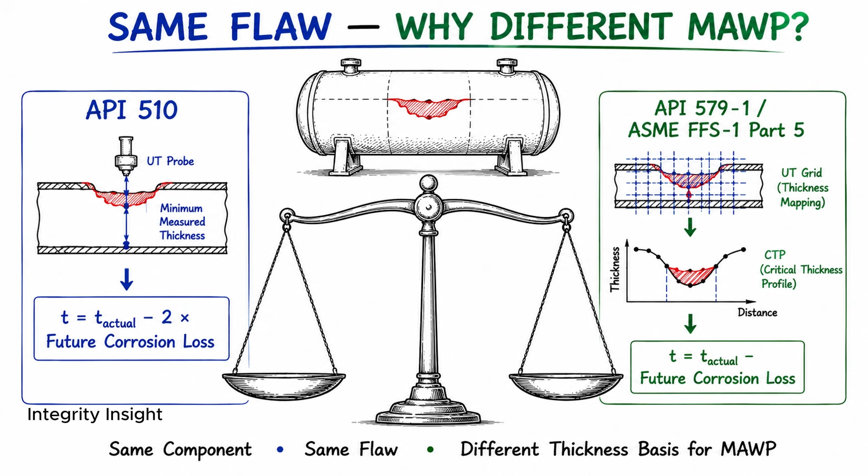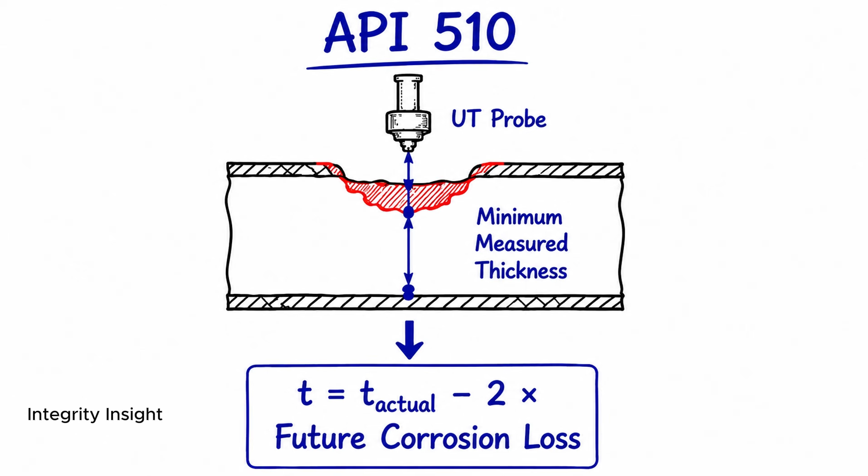How can the same metal loss flaw produce a different assessment MAWP under API 510 and API 579 Part 5? Under the API 510 approach, the thickness used for the future MAWP calculation is based on the actual thickness, minus 2 times the projected future corrosion loss. Under API 579-1, ASME FFS-1 Part 5, the future corroded thickness is based on the actual thickness, minus 1 projected future corrosion loss.

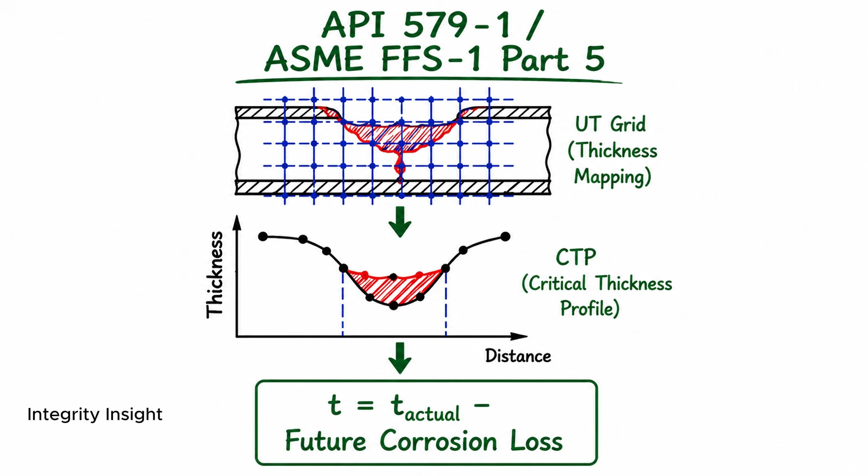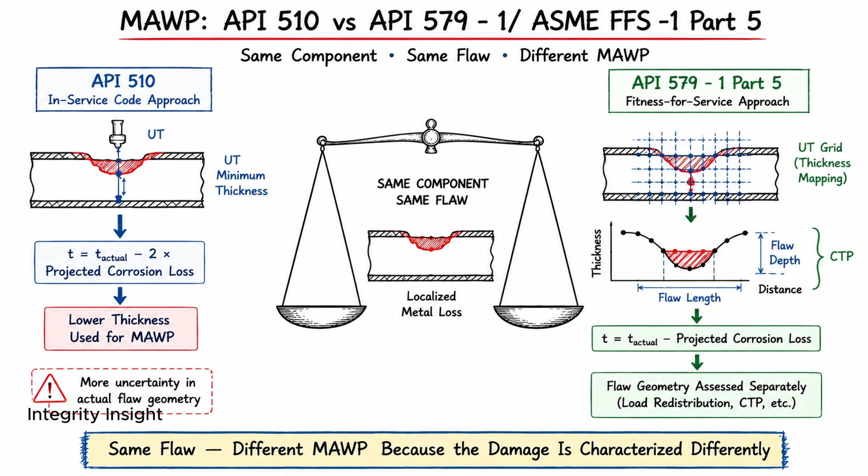Same component, same flaw, so why the difference? The answer goes beyond the equations. It has a lot to do with how much is known about the actual flaw before its pressure retaining capability is evaluated.

Under API 510, there may be a reliable minimum measured thickness, but that value does not necessarily provide detailed characterization of the localized metal loss geometry. It tells us how thin the wall is at that measured location, but not necessarily the complete depth, length, width, and thickness distribution across the damaged region.

One way of understanding the additional projected corrosion deduction is therefore in the context of uncertainty surrounding the actual governing condition of the flaw. The thickness used for the future MAWP calculation is T equals T actual minus 2 times the projected future corrosion loss.

That additional deduction reduces the thickness credited in the pressure calculation. And because MAWP is directly influenced by the wall thickness used in the pressure equation, a lower value of T ultimately produces a lower projected MAWP.

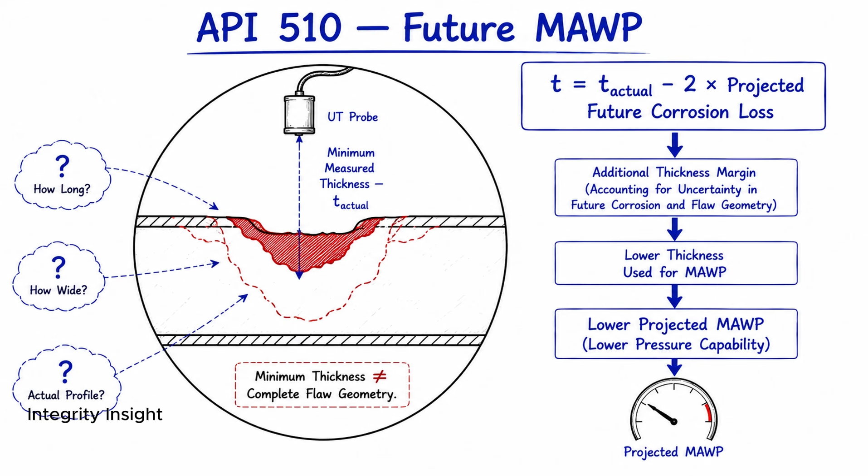API 579 Part 5 approaches the same flaw differently. The damaged region is characterized using detailed thickness measurements. A UT grid is developed, and from that inspection data, the critical thickness profile, or CTP, is established. The assessment now has more than a single minimum thickness. It has information about the depth, length, and actual thickness distribution across the damaged region.

This matters because the structural effect of localized metal loss depends on more than its deepest point. A relatively short local thin area can benefit from stress redistribution through the surrounding thicker material. As the flaw becomes longer, that ability to redistribute the load reduces. The future corroded thickness is established as T equals T actual minus the projected future corrosion loss.

But this does not mean API 579 simply gives the damaged component more credit. The structural effect of the actual flaw is evaluated separately through the fitness for service assessment. And this is the important distinction.

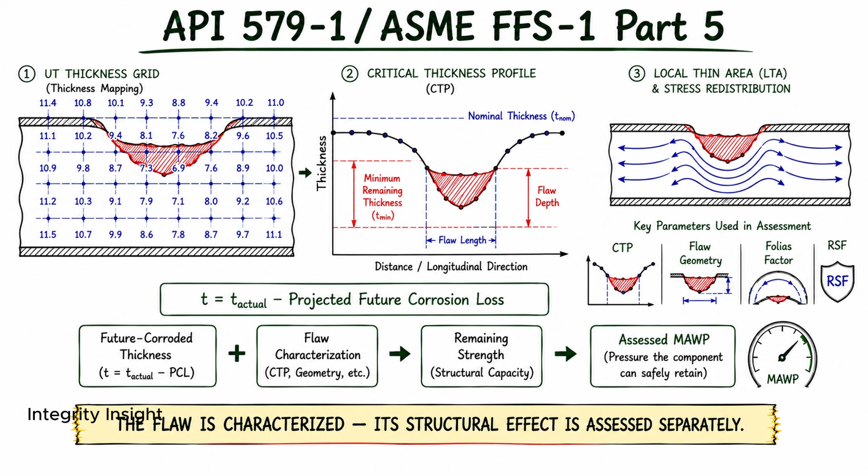Now back to the comparison. The real difference is not simply 2 times the projected corrosion loss versus 1. There is more behind those numbers. With API 510, the localized flaw may not be characterized to the same level as a detailed fitness for service assessment, and an additional thickness margin is reflected in the future MAWP calculation.

With API 579 Part 5, more information is developed about the actual damage. The flaw is mapped, the critical thickness profile is established, and the influence of the actual flaw geometry on remaining structural strength is evaluated separately.

So when the same flaw produces different assessment MAWPs, do not look only at the 2 equations. Look at how the damaged condition was characterized, how the future thickness was established, and how the structural effect of the flaw was accounted for.

Same component, same flaw, same projected corrosion, but a different assessment approach. Ultimately, both are trying to answer the same integrity question. How much pressure can the remaining component safely retain as corrosion progresses?